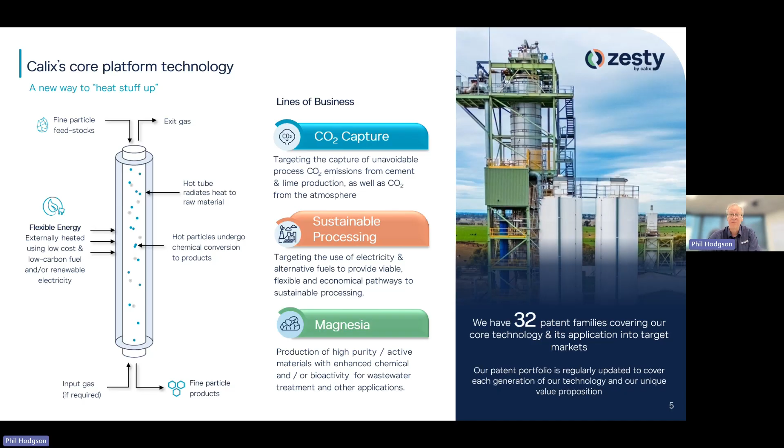One area that I'd like to emphasize a little before we head into the talk in more detail is energy flexibility. We're very lucky to have Dr...

Ingrid Burfurd here from the Superpower Institute, who'll be speaking a little later on about a recent report from the Superpower Institute concerning a green iron opportunity for Australia.

Energy flexibility is one of the things that our kiln is really good at. We've now built our very first direct electrified kiln. We apply a small voltage but high current down this tube, and that heats the tube up. So there's no external electric heating like a toaster element. We can actually heat the tube up with a direct current, and that allows us to switch between traditional flames, fossil fuels or burning waste, etc., and actual electrification of the tube itself.

That energy flexibility means value, especially as grids decarbonise, they become less stable. The ability to help load balance those grids is a really important development for this particular technology.

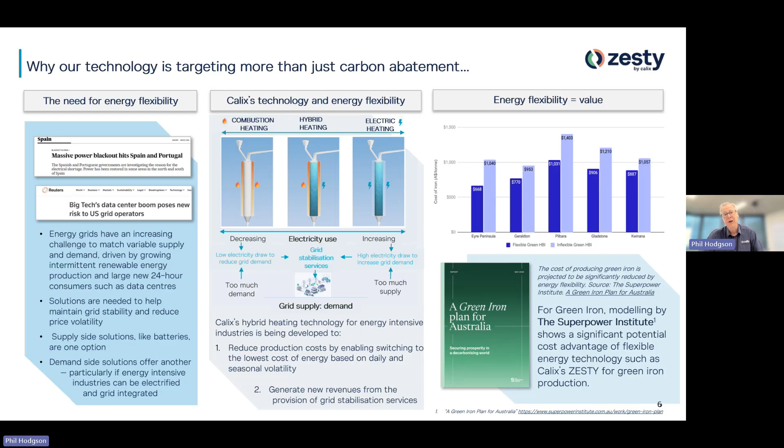I know Dr. Burfurd will be taking us through the Superpower Institute report and the context under which that creates value. Dr. Burfurd will cover that. So I just wanted to emphasise that because that's an important aspect of Zesty.

Presenting today alongside me will be Chris, and he'll introduce himself a little further down. But what I wanted to certainly cover off in the first couple of sections here is the significant new milestone that we announced last week, and also a little bit about what's happening globally before we jump into the deep dive with Chris.

In terms of the announcement last week, you would have hopefully seen that we were able to announce ARENA support for our demonstration project. The first plant we built is capable up to about 500 tonnes per year in terms of its capacity or throughput. This one here, we're targeting 30,000 tonnes per year.

So it's a fairly large undertaking. Chris will cover the project in a little more detail further down. The tube or the size of the plant itself is no bigger than what we've already built for cement and lime. But of course, this one's for iron and steel. So this one here will be our first full-scale tube for iron and steel.

The ARENA grant was particularly pleasing to announce, 44.9 million for a $90 million project overall. The site will be in Australia, but there's a few options. They remain commercial in confidence while we finalise those site agreements.

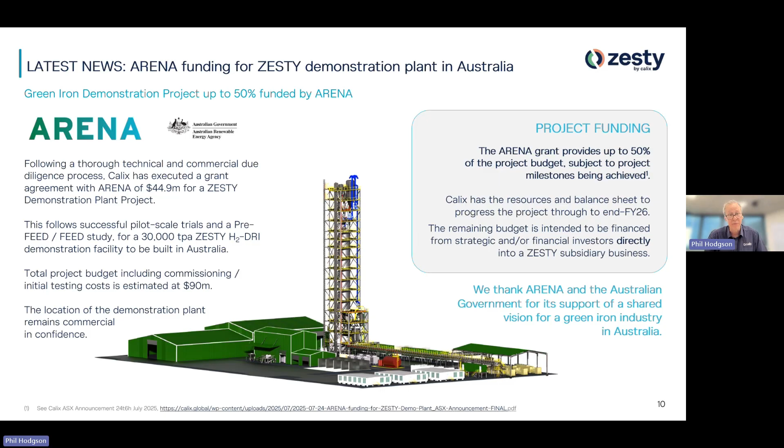But very pleased to announce that the grant provides up to 50% of the project capital. It includes some of the commissioning and also test running of the facility. So a great step forward for us.

And of course, two weeks ago, we had the Prime Minister in China with a delegation, including four of the largest iron ore players here in Australia. There was a round table session with the Premier of China on the green opportunity for steel decarbonisation between Australia and China. China producing 50% of the world's steel, roughly. So pretty important, and it really is technology right in the middle of the opportunity for Australia and obviously with some of our major trading partners like China.

The other thing that we'll cover off as we do the deep dive is maybe some comments around, well, is green iron or steel ever going to be economic? The work that we'd done in the FEED study, which was also supported by ARENA, suggested we could start to get green iron produced into that sort of $400 per tonne range, as long as we had the power down around the 23 to 30 US bucks per megawatt hour.

35 to 50 Aussie bucks per megawatt hour. So we are starting to get into that frame, and it's particularly encouraging with ARENA, whose top priority is to get renewable levelized cost of electricity down to 20 Aussie bucks per megawatt hour. So while there's a way to go there, there's been a 90% reduction in the price of solar power in the last 12 years. So the trend is very strongly in our favour to get down to those sorts of low levelized cost of electricity prices, and that can only be good with respect to where we're going to end up with an economic opportunity for green iron here in Australia.

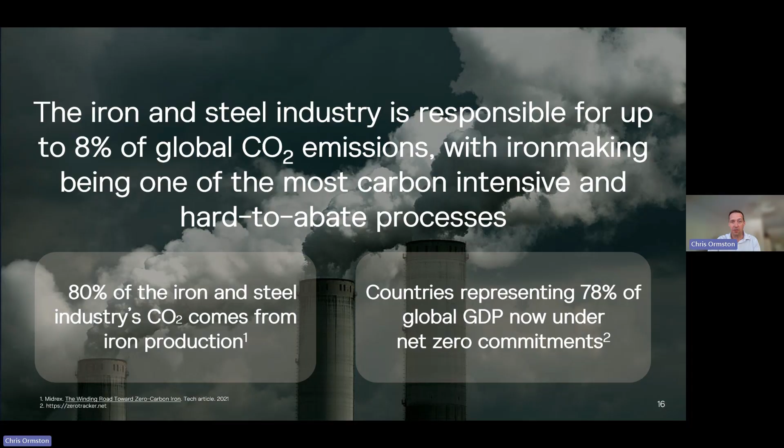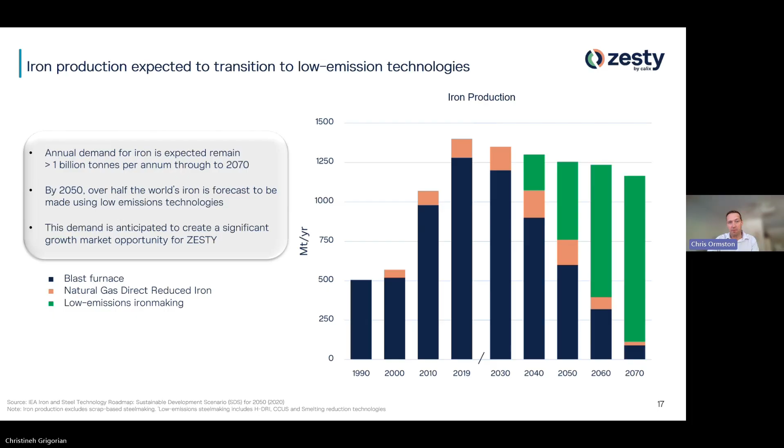There's 4 major iron ore provinces globally, each with different ore types and grades. Australia, predominantly goethite, hematite, mid and low grade ores. South America, hematite, mid and high grade. North America, taconite, hematite, and magnetite, mid and high grade ores. And in South Africa, particularly hematite, high grade.

Australia is the largest producer of direct shipped ore globally, predominantly low and mid grade ore supplied into the Asia Pacific region. Forecast increases in volumes of DRI and EAF steelmaking routes towards 2050, requiring higher grade input ores, poses a future threat to Australia's iron ore export economy. All major iron ore producers must consider future-facing technology options available to them that have the capability to process a range of ore grades with minimum energy consumption and emission. And this is really the target for all emerging technologies in iron and steel making.

Global steel production in 2023 totaled just under 1.9 billion tons, of which 1.4 billion tons was produced in Eastern and Asia Pacific regions. 71% of global steel production is currently via the blast furnace route, and the remainder via the electric arc furnace. EAF process routes typically consume high-grade ores and steel scrap. Blast furnaces historically consume low and mid-grade ores, typically in the form of lump and sinter, however with an increase in pellet consumption in more recent years.

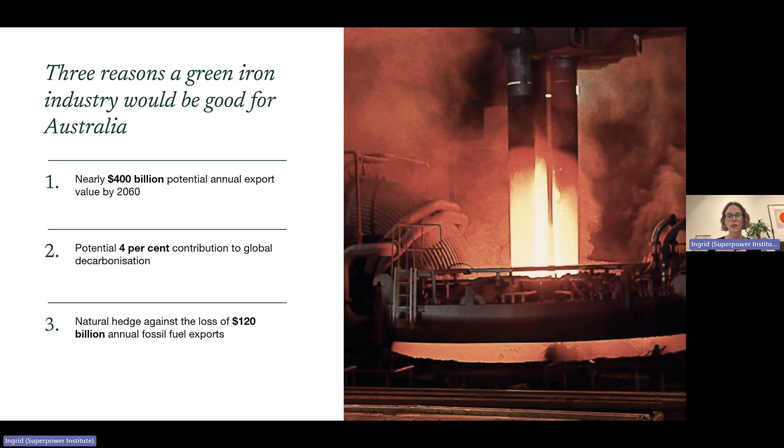And third, green iron exports are a natural hedge against the loss of Australia's fossil fuel industries as the world decarbonises. Coal and gas are currently worth about $120 billion each year to the Australian economy. But very fortunately for us, the same progress towards decarbonisation that will depress fossil fuel exports will also lift green exports such as green iron.

We modelled green iron production to essentially get a look around the corner, to anticipate what the industry might look like and to gauge the effect of the different policies we wanted to propose. The modelling I'll present today is all based on publicly available information. As with all modelling, we had to make a number of assumptions, but these are very clearly and transparently documented on our website and in the appendices for our report.

So I'm presenting this work as a researcher and presenting TSI's results in that capacity. I am not a spokesperson or an advocate for any one technology ahead of another. It is worth clarifying before I jump into the modelling that our work does reflect our expectation that we will be able to produce high-grade DRI in Australia with both low and mid-grade ores, in addition to high-grade ores, obviously, by augmenting DRI technology with electric smelting furnace technology.

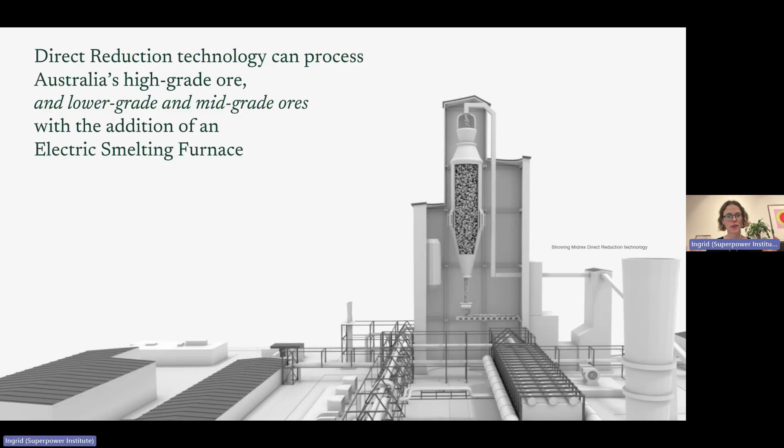So what did we model? We modelled green iron production in 5 locations around Australia: the Pilbara, Kwinana and Geraldton in Western Australia, Gladstone in Queensland, and the Eyre Peninsula in South Australia. These locations were chosen for their access to iron ore, to ports, and to good renewable electricity.

Each green iron project includes green electricity generation and storage, green hydrogen production and storage, and 2.5 megatons per annum of green iron production based on green hydrogen use.

The modelling incorporates 2 types of green iron making technologies. What we in our report refer to as an inflexible technology needs to operate continuously or near continuously, with inputs based on existing technologies. Alongside it, we also model a flexible technology, which can more easily ramp production up and down, so it doesn't need that same level of continuity in the supply of renewable energy and green hydrogen. Our inputs when modelling a flexible technology were based on Calix's Zesty.

Our model also includes hourly renewable energy capacity for each location and, where available, prices and availability from the local electricity market grid. Of course, we also include capital and operating costs.

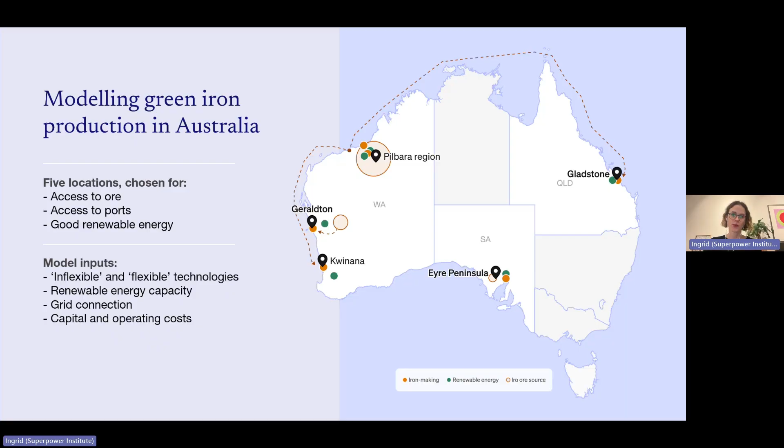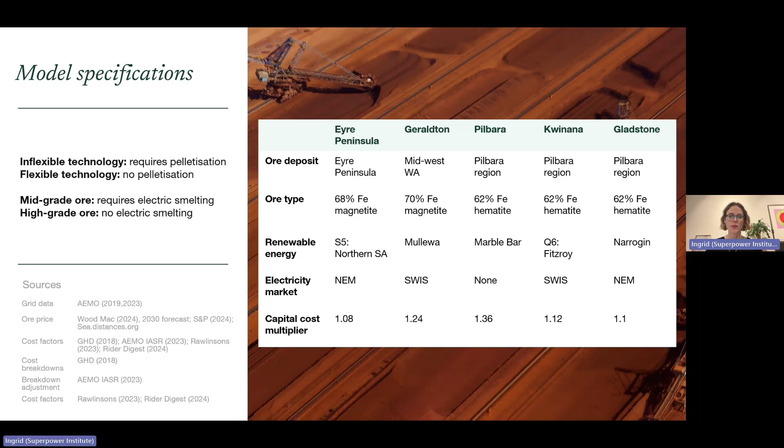All of the scenarios that we considered, except for the Pilbara, are modelled as grid connected, and our model includes the cost of shipping ore from the Pilbara around to Gladstone and down to Kwinana. This means that our modelled producers in the Pilbara, Kwinana and Gladstone are all processing a hematite ore with 62% iron content, while producers in the Eyre Peninsula and Geraldton are processing a higher grade magnetite.

So what did we do with all of these inputs? We used a dynamic optimization model to identify the lowest cost combination of investments and production in each location and with each technology.

Now turning to the results of that modelling, what you can see very immediately is that there is very substantial cost variation across technologies and locations. That cost variation ranges from $670 a tonne in the Eyre Peninsula and $770 a tonne for producers in Geraldton using a flexible technology, all the way up to about $1,400 a tonne for producers using an inflexible technology in the Pilbara.

So when confronted with this level of variation, the natural question to ask is, what's driving it? The first analytical insight from our model is that flexible technology is likely to substantially reduce the cost of producing green iron. That's because the scope to ramp production up and down more easily means producers don't need to invest in the same level of very expensive renewable energy capacity and storage to account for periods when the sun's not shining, the wind's not blowing, and stored electricity isn't readily available.

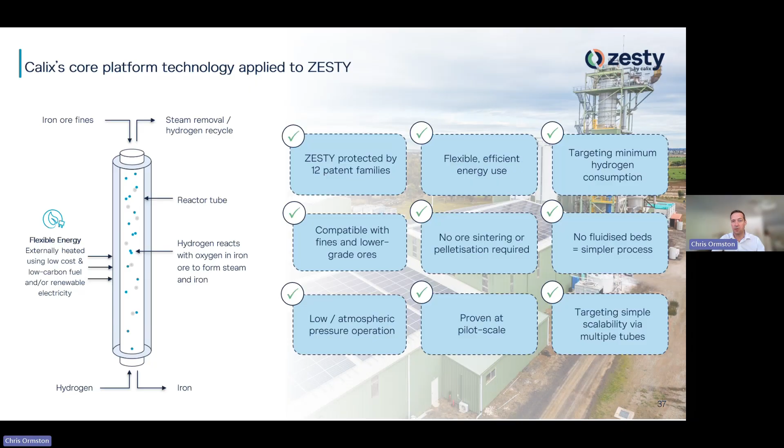Moving on to our business model. Our business model is to be capital light, providing maximum flexibility and accessibility to the technology under license agreements and a royalty mechanism. Zesty will provide engineering design services for commercial scale plants. Iron and steel producers may build and operate a future Zesty facility under license.

This approach utilizes the supply chain and purchasing power of major global producers. A Zesty plant may be built at lower capital intensity without the high overheads and margins typically retained by global OEMs. We envisage this strategy promotes a partnership opportunity accessible to the whole of industry, allowing Zesty resources to be available to deliver continued service and support to the owner-operator for the full life cycle of the facility, without the requirement to build out a capital-heavy organization managing EPC or EPCM contracts.

Available market data suggests significant growth in the consumption of DRI, or direct reduced iron, via the electric arc furnace processing route as blast furnace and basic oxygen furnace processes phase out to 2050 and beyond. Taking conservative assumptions supported by various public sources, 25% of existing feed into blast furnaces may be substituted with direct reduced iron or hot briquetted iron.

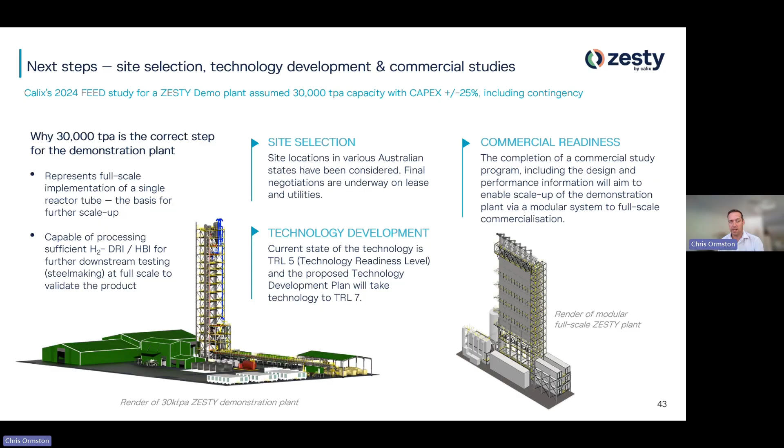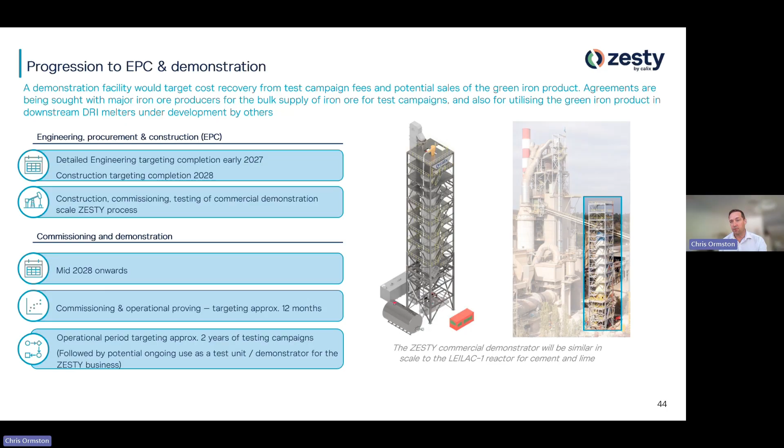Operating on a campaign basis, the test plan is purposely intended to actively progress technical de-risking to inform future commercial design. A series of customer campaigns are to be targeted in order to achieve end user validation, e.g. hydrogen consumption reduction degree and product specifications. The intent is for the plant to have a continued life beyond demonstration as a commercial research and trial facility, with the capability of being adapted for processing other critical minerals in the future.

I'd also like to talk about the team we have in place. I introduced myself earlier, leading the sustainable processing business at this stage in Calix. I also have Sebastian van Dorp, who's joined us in the last 8 months, who has a very strong background in iron ore and has come from major global ore companies and in technical marketing roles. Seb's brought a significant amount of experience to the team and is engaged with a lot of international ore companies as well for potential further testing in our existing pilot facilities.

Also have Ian Dunn, who joins us at the same time as Seb, comes from a background in downstream processing in global OEMs and brings a lot of valuable experience to the team as we start to roll and build the business out. We also have the pleasure of having Professor Jeff Brooks and Dr. Sarah Hornby acting as technical advisors, globally recognized academic and industry specialists, bringing great wealth of expertise as we form our initial technical advisory board for Zesty.

And of course, as the project develops and we continue working with our industry partners, there's an opportunity for further technical advisors from industry to become part of the advisory board as we continue to develop the Zesty technology.